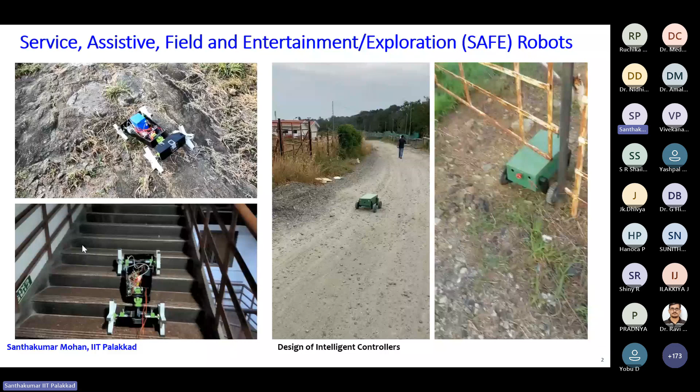So some of the non-conventional systems I want to show here. For example, this is a WHEG, which is a wheel and leg combination. This can actually work in all terrain or even on engineered surfaces. You can see the same robot working in rough terrain, as well as on an engineered surface like a staircase. That is the whole idea we pursued.

In the same direction, several times we need a silent system or a rough surface maneuvering system, which we call an all-terrain vehicle. Normally you'd see lots of suspension in such vehicles. When you talk about a small size that one person can carry and launch, we call that a tactical vehicle. So there is a challenge.

So we thought of building a passive or active leg-based mobile robot. You can see this robot has four legs and four independent wheel drives. The legs act as suspension as well as an obstacle maneuvering system. These are the kinds of robotic systems we work on, other than conventional service and field robots.

For example, this particular robot we autonomously launched and communicated that it should go to the top of a small hill terrain, do surveillance, and then come back. You can see the robot trying to climb, and the ramp is very steep. It is trying to navigate and go up. That's what we are working on.

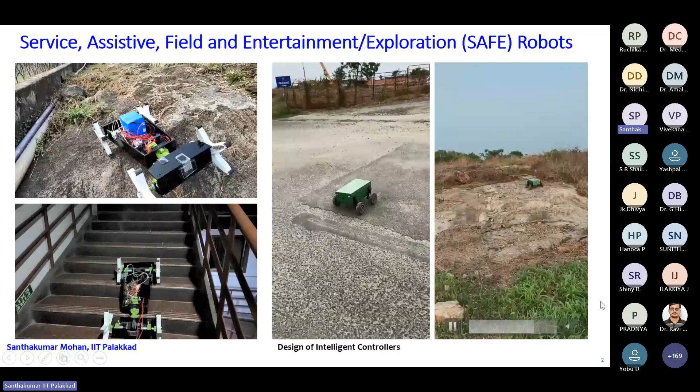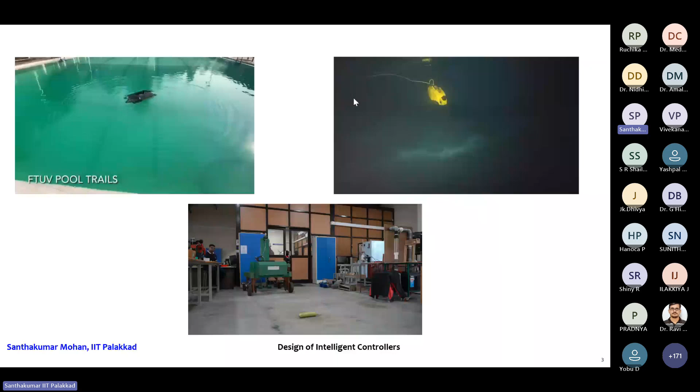Later on, we moved to the other side, the service and field robot area. We recently developed two underwater vehicles, one observation type and one intervention type. Both of them have now had their technology transferred, and a private company is commercially manufacturing them. If anyone is interested in buying one, let me know and I will connect them. These two robots were tested in our facility and then transferred.

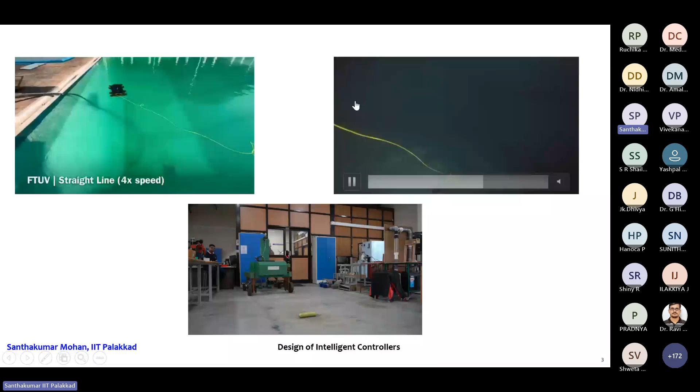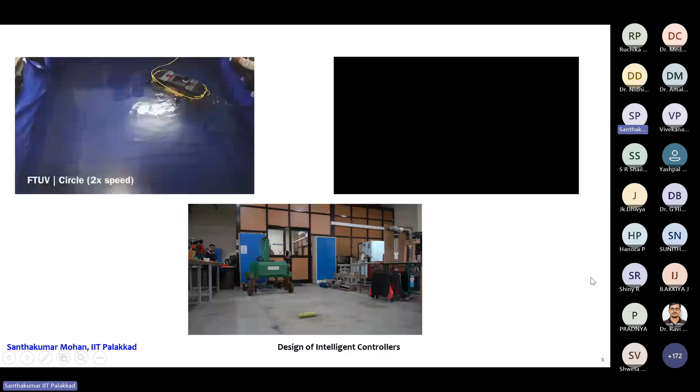The whole idea is that it's very silent, almost like a fish, so the energy required is less, and it can do different purposes. This one is for intervention, meaning it involves an operating end, and that particular robot is still experimental.

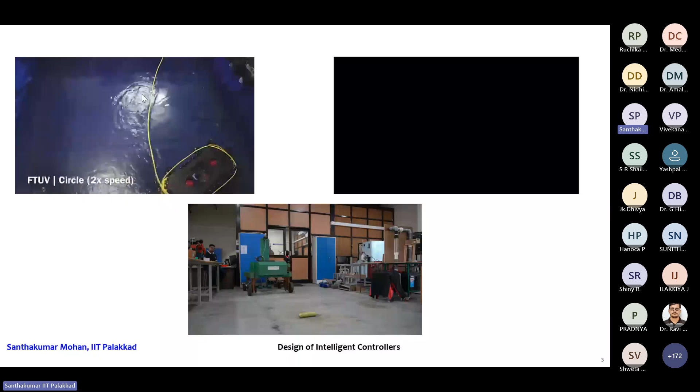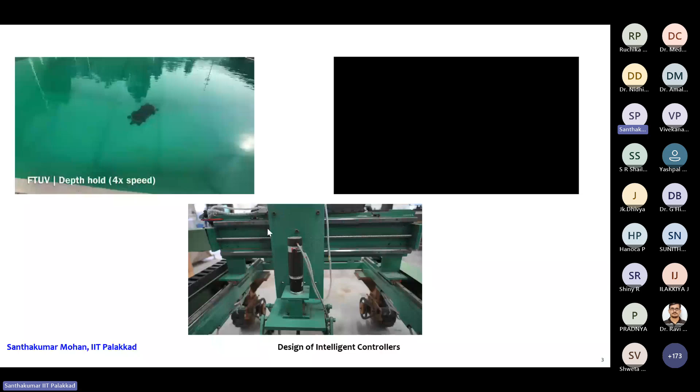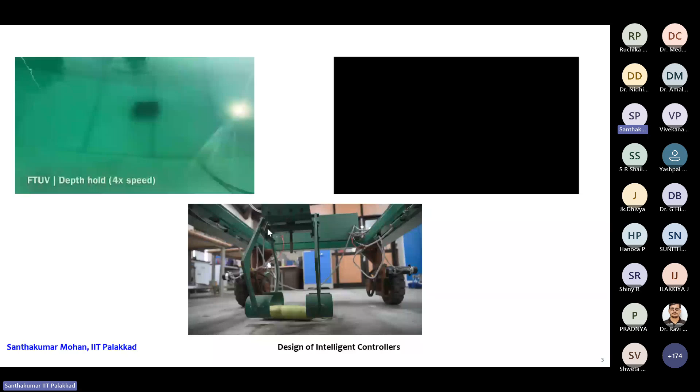In the same way, we were involved in several defense related projects. One time they gave us a task on ammunition handling, so we thought of developing a small ammunition handling system that could be put into inventory. Later we found it takes a long time to get cleared by the defense organization, so meantime we tried to demonstrate it could be used for fruit harvesting or vegetable harvesting kind of applications.

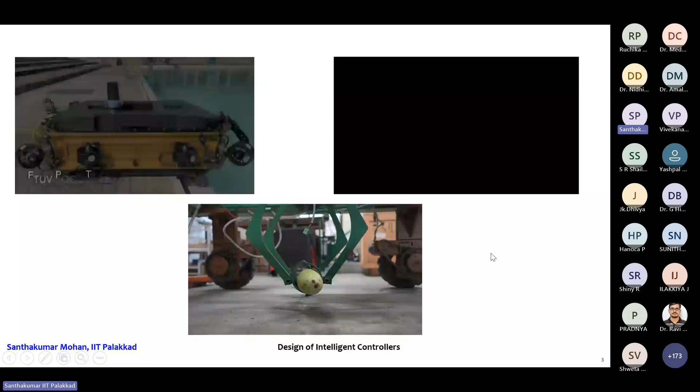These are a few service and field robots we work on in our group. Now you can see a few selected projects from our BTech students. For example, this is an aerial-cum-ground based robot, or this is a purely aerial robot. We work from aerial to marine robots, terrestrial to, you could say, space. These are the kinds of systems we work on.

One more thing - when we talk about our lab, whether it's an internship student or a PhD student, they would be involved in product development apart from their core research, so that at the end of their course or degree, they come up with a product. That's the idea.

For example, this is one intern who came for a BTech project to our group, and we made a small rehabilitation robot. Later it was sent to a Swiss-based company, and now they are developing their own prototype or product.

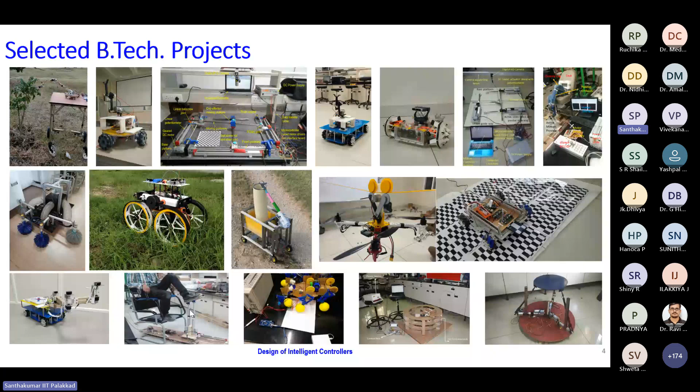So these are a few examples of how our group is working. Now let's come back to our original topic, which is the design of intelligent controllers.

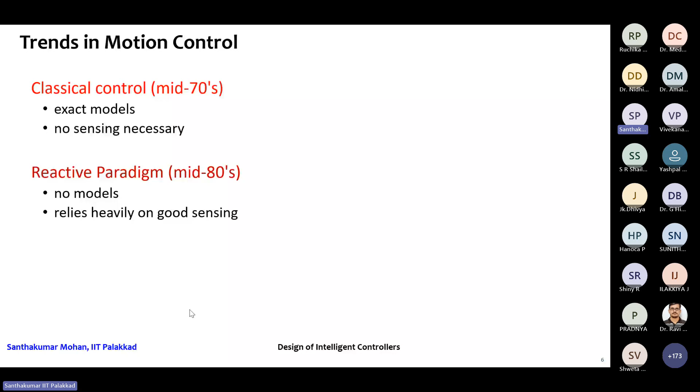Then people thought that classical control and reactive based control could be combined. This is one of the popular approaches we call hybrid control, where the model based approach is used at a higher level - for example at system level, the controller would be designed in the old classical way, meaning some model base would be involved. For example, if I talk about a robotic system, I use a tentative model, then for the individual actuator - for example, the motor of each axis or each wheel - I try to control it in a reactive, feedback based way. This was working very comfortably in a certain group of robotic systems.

For example, you take CNC or simple fixed-based manipulators - these are all working well. But when you talk about a system which is very complex, non-linear, or you can say unstructured, these are not working.

So what you need to know is how to predict. For example, you have a limited sensing, say a sensor only for velocity measurement. Can I find the displacement or position? Yes, I can integrate once and do it. But when I am doing integration, I need some model so that I can predict better.

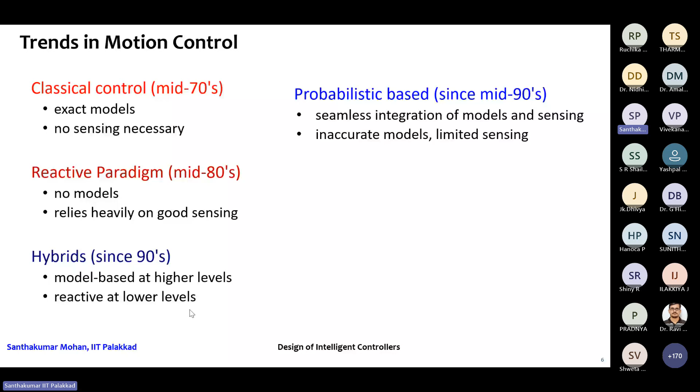So people tried to see if there is anything better. At that time, fortunately or unfortunately, computers were very popular and the computing facility was better. GPUs started coming, then people tried to build a data driven model, which is what we call learning based control.

Now I am going to call that intelligent control, because if you look at it, even in the 80s and 90s, intelligent control was purely based on something like soft computing based controllers. For example, Professor Behera wrote a book on intelligent system control. It starts from neural network, then fuzzy logic based control, then weighted and weighted-less approaches. These are all simple, you can say, compensation controls.

But now we are moving towards data driven, that is learning based control. That is where we are defining intelligent control, and that is where I'm putting a progression of control techniques. For example, the transfer function based, simple linear ODE based control we talked about in the 80s—this is what we call classical control. Then the improvement on controllability came.

People thought why can't we use a state space, matrix and vector based, and that became nonlinear. Then they thought why not use soft computing, so they brought in fuzzy factor or neural networks. Then knowledge-based control, which we call knowledge control, ruled in 2000 to 2010. When 2015 or 16 came, learning-based control became popular, and that is where we are actually stuck. That is what we call intelligent control.

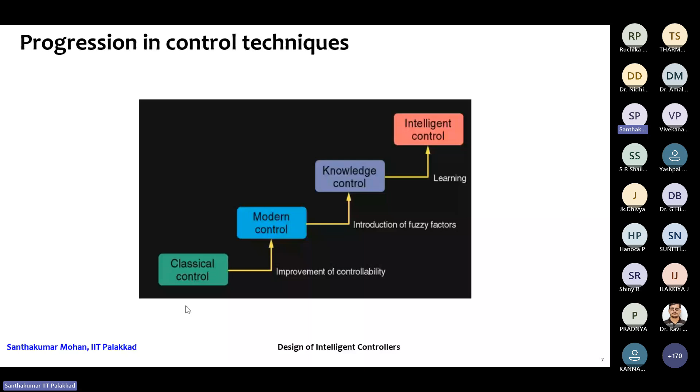When you talk about these things, you should know what intelligent control really is. So in that sense, we will recall what the human being or any animal is doing. You all know that.

Whenever a baby or any living being is formed, the first realization in the mother's womb is one cell. That one cell will start beating, meaning the heart cell starts coming in the mother's womb. Since then, nobody has planned, developed or designed a controller, but the heart and the entire system evolved. So any one cell started in the mother's womb knows how to behave when some situation comes.

For example, if a baby is put in a cold climate, it starts shivering so that the body temperature increases and comes back. Or if a kid is running a sprint, afterward the breathing will have a problem, you can see that. The body will start sweating, and long breaths will happen, and these activities come by default. There is no design for this to happen.

So then you can think about how nature gave intelligence to individual systems, which could not happen with machines. So what can we try? We can try to imitate how the human being or nature brought about this living biosystem that we are trying to extract. This particular idea is what we call artificial intelligence, because we are inducing intelligence based on a bio-inspired system. If you talk about this, there are actually several subsections.

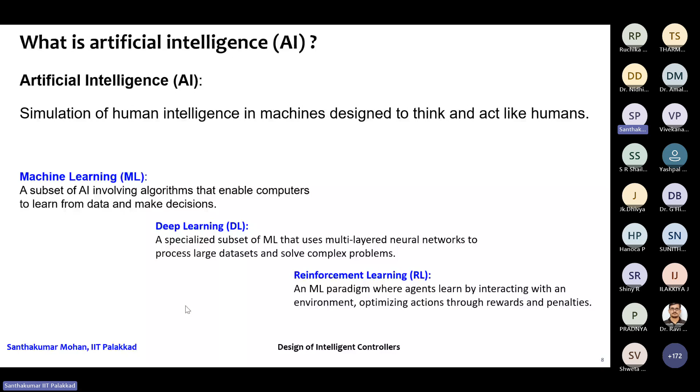So now you know the different techniques in learning: ML, DL, and reinforcement learning. Now we will go back to the original purpose, but before that, I want to give a different idea on the types of AI.

There are two types of AI: one is analytical AI, the other is operational AI. Analytical AI is based on the data set. For example, now you are searching in your Facebook or Amazon. So today you are searching for something, and when you open it next time, those options will be put in front of you on the screen.

So what you call the analytical AI, it is based on your previous attempt, and you can actually make the decision. So it's all kind of predictive in nature. For example, machine failure or recommendation in Facebook, Instagram, or Amazon. So these are all based on past data processing, you will be getting the recommendation or some kind of decisions.

But what we are actually focusing on, which we call intelligent control, is very similar to another subset. For example, autonomous car or controlling a spacecraft through AI technique. This involves a physical environment and taking a decision based on the experience you get then and there. So that is what we call operational AI. It acts on data to perform real world actions and manage physical systems, like autonomous driving or factory automation. So these are all what we are calling operational AI.

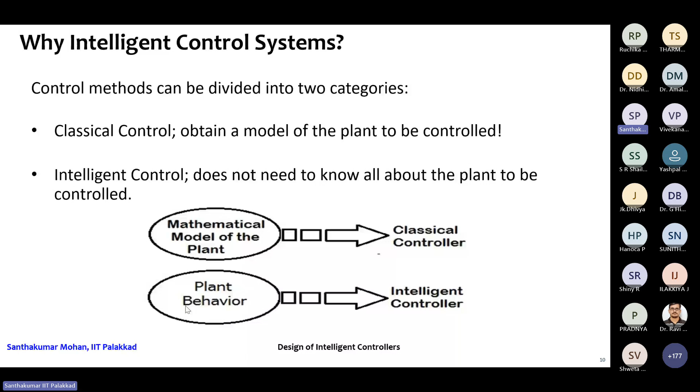When you talk about intelligent and classical, one is a mathematician's approach, whereas the other one we simply call the lazy man's approach, because it doesn't require any mathematical or analytical relations. It is purely, you take the system and run the system, see the behavior, and then you develop. So indirectly, the intelligence falls on the designer. Now you can actually change the intelligence to come from the software. So that is the whole idea from classical to intelligent control.

For example, in classical control, the software is fixed. So the designer of the controller would say, okay, this is my controller, this is the sensor data. If the sensor says this much thing, you act or give command to your actuator like this. So this is the way it is all there, indirectly inside the software. The command is predefined. So if it is actually 10% error, you can say 5% control action. If it is actually 20%, 10% control action. Like that, it is all predefined based on the system.

Whereas the intelligent controller is different. The behavior and the corrective action is happening then and there, based on the existing data and what is happening currently. So that means the software is actually evolving based on the design. So that is what we are trying to see. Whereas the classical controller designer, based on the software, readjusts all the parameters, here the designer is trying to readjust the algorithm so that it can work better. That is what we are trying to see.

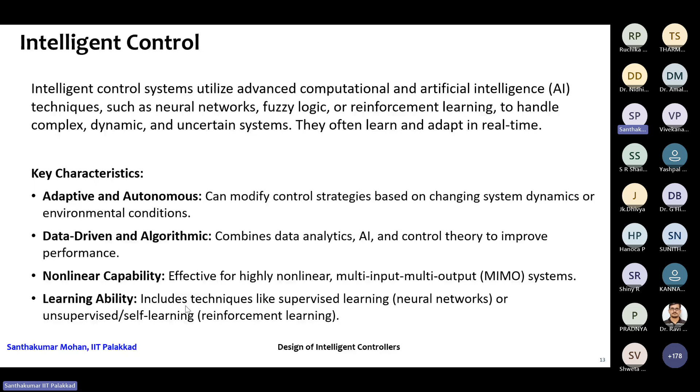That makes the system learn and adapt in real time. That's what we call intelligent control. There are several differences between classical knowledge-based control and advanced intelligent control systems. One is AI-driven, whereas knowledge-based is purely rule-based, if-then, built on expert knowledge, so it's not changeable. Whereas intelligent control is AI-driven, so learning and adaptability are there.

If you put it that way, the application where knowledge-based is popular is fault diagnosis, whereas intelligent control is popular for robust robotic control or autonomous vehicles. It looks like transparency becomes a black box, because you don't know how the evolution happens in an AI-driven control algorithm, whereas knowledge-based is very explainable because you are only feeding the rules.

Now if you put it that way, when and where to use each, you can easily understand. If decision transparency is crucial, use knowledge-based; if that's not crucial but adaptation is crucial, think about an intelligent control system. If the environment is dynamic and uncertain, then you can definitely use intelligent control.

And the system is like in modern days, right? So everything is completely non-linear and an explicit model is not available, then you can definitely use the intelligent control system. That is the whole idea behind it.

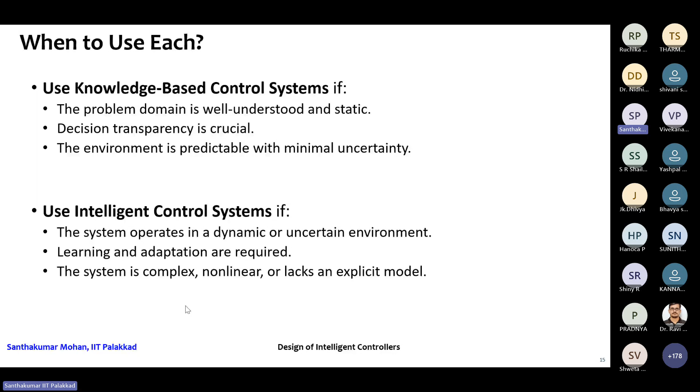So now we know the intelligent control definition, right? What really does intelligent control do? There are three things it is fusing. Automatic control is one of the bigger sections in the electrical or control community. Automatic control and optimization through operations research, these two fuse and evolve based on the algorithm coming from soft computing or AI-based methods. So all three fuse, and nature brought this as intelligent control.

So now, if you talk about intelligent control design, there are many things I mentioned. You have to know what kind of advanced algorithm to use, what technology to enhance for decision making, and how to use that technology to adjust your parameters, adapt your nature, and fine-tune the performance of the control system. So there are several questions to ask. Think about a simple control design: what do you need? System dynamics, right? But here we are not doing it that way.

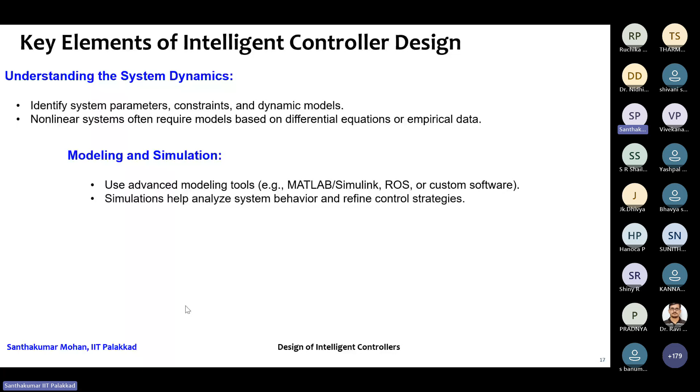So you put layer by layer so that you can make your algorithm flexible and evolving, in a learning base. Then you bring in the intelligent layer, which gives adaptability and self-evolving or self-learning capability, and it gives a decision: do I need to learn further, or am I already done? Now I use this data for executing further. This all happens based on several layers, so these are all important key elements.

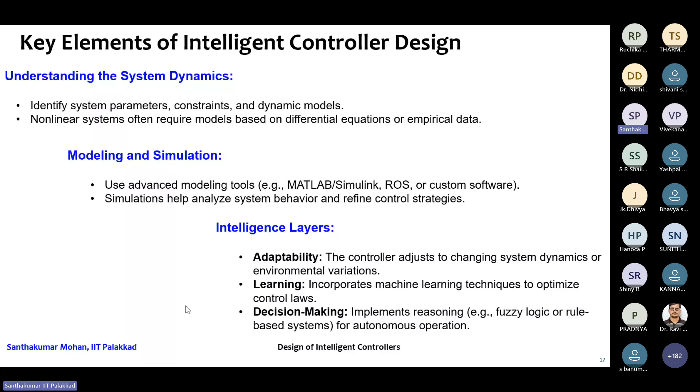You have to understand the system dynamics, then perform modeling and simulation, then bring in the intelligent layer where you put several fuzzy sets or neural networks or some kind of algorithm which makes the system better. So then you get the element, and within that element there are several algorithms and approaches.

If you look at it, there are several popular approaches you have already studied under different terms. For example, fuzzy logic controller, which you would have studied in introduction to AI or soft computing. For example, take the washing machine: in the old days it had fixed on-off control. When it evolved, intelligence was brought in based on simple fuzzy logic, meaning simple linguistic rules can handle it.

For example, during a power cut, the washing machine will immediately trigger and freeze the timing at the point it stopped. When you restart with the power on, it won't go back to zero, it will start from where it got stuck. That kind of intelligence was brought in.

The same way, we brought in the neural network based controller, which is what we discussed earlier. For example, system diagnosis or condition monitoring all require some kind of database so that you can predict how the behavior will come, and then adapt accordingly.

The same scenario applies to adaptive controllers, where there are multiple types of adaptation: direct adaptation, indirect adaptation, model-based adaptation, or simple feedback-based adaptation. But when you talk about an adaptive controller, the key thing is it adjusts the parameter.

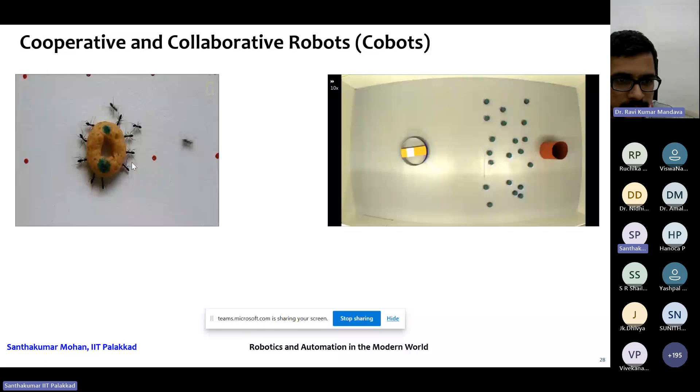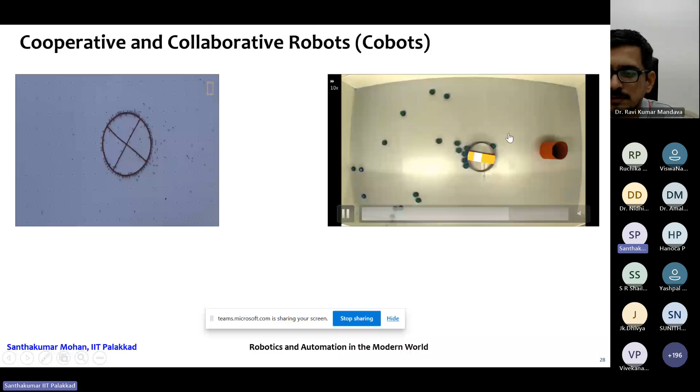Imagine multiple ants in front of that—there is a donut or you can say vada there. How the ants are handling it is purely based on intelligence and swarm coordination. Now, if you think the similar way, there are multiple mobile robot agents, and one is communicating with another—it's not predefined. So now you can see each robot is evolving, and you can see how it is moving the same way. This is what we are talking about intelligent control—it is based on the group target, and each robot tries to see where the targeted vada or donut is.

Okay, for example, now all the robots are commanded, so some of them are actually trying to find it, some are still searching. Once some of them find it, they try to push it to the goal, and during the evolution you can see that multiple robots are actually going back and coming. So this is the problem the previous audience asked about, right, not everybody is actually continuing and pushing it.

How are the ants doing this? Ants have a bit of intelligence, right? So the robot also has the same intelligent level. It's not like a human being where everything is processed and then pushed further. It is not like that. So this is where we are seeing intelligent control design evolving, and we are trying to see how nature does it, and in a very similar way we are trying to put it into practice.

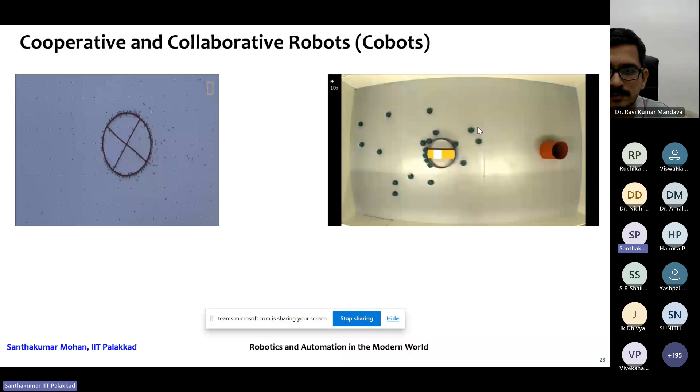So in that direction, one more example can come. For example, take a group of ants together. Comfortably, it will not even be a problem. For example, when they are taking a log, it will go comfortably.

The same thing, if I put it, for example, two mobile manipulators carrying probably a lamp post - if these two are autonomous robots without any predefined collaborative target, it may fail, right? So if I talk about intelligent control, if these two can carry and post it in a proper location, it's a huge challenge. This is where we are trying.

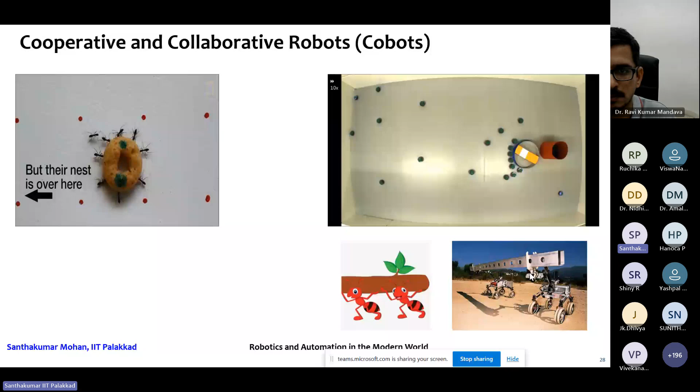How does a human being, for example myself and Ravi, handle one board? We are able to handle it. But now imagine the manipulator is supposed to handle it - it is not that easy, right? So these are the challenges which are put forward.

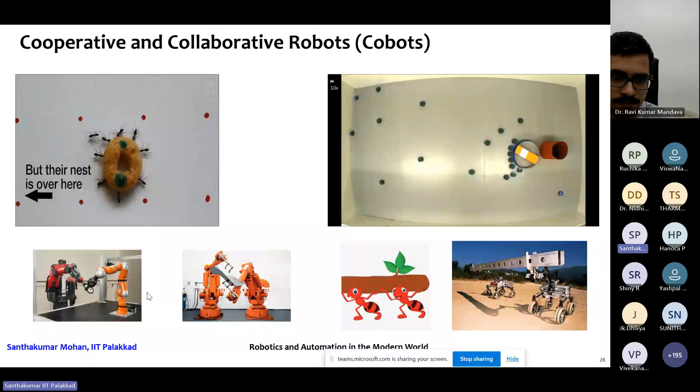If anybody was looking for a direction of problem, these are the interesting problems which most of the robotic community people are looking into in terms of the intelligent controller part. And one of the bigger issues when we talk about future robotics, definitely intelligent control is one of the bigger issues.

But there are two subsets. One is the repetitive task, like...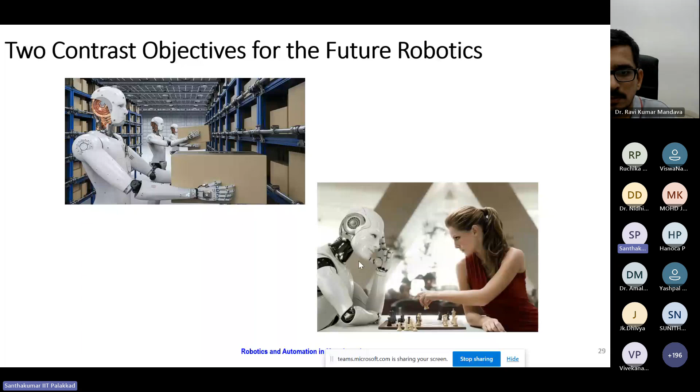So when you talk about the challenges and the problem statement, these are the directions which you can evolve, and then you can see the focus of roboticians moving towards this direction. And I end with this particular slide, thank you. So I hope you got an idea of the challenges, and are getting some clarity on how to design, or at least how to approach the problem.

Participants, does anyone have any questions still?

So RL cannot be better - okay, so when would it be better? When the traditional motion planning fails. So where you cannot develop, for example, SLAM - SLAM is conventional, right? But it takes some time, actually quite long, and it will not even give the localization properly. So then the RL based algorithm can be improved. That's why I said RL cannot just be taken for granted.

So somebody try to open and ask a question, please. So they're opening by default. Okay, okay, then I will close my side.